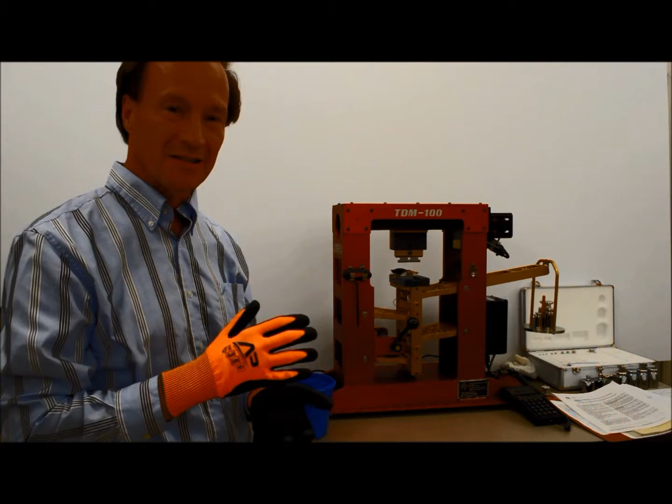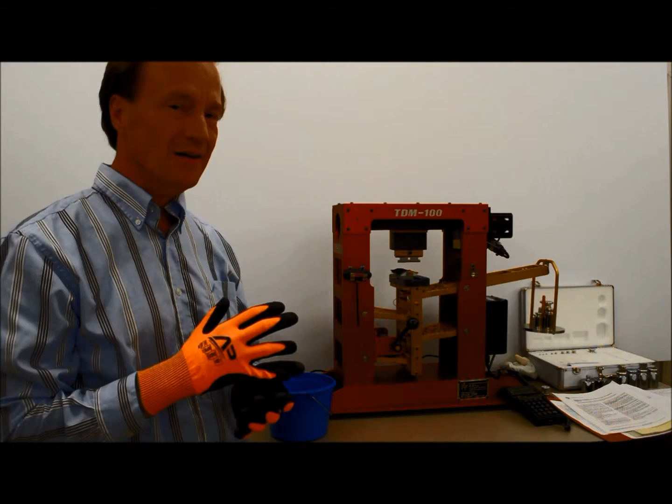This afternoon I wanted to talk to you about how you develop a cut-resistant product line. For our new product line at Apollo Marketing that are color-coded by the ANSI cut level, we've done a lot of cut resistance testing. Today we're going to show you how you do that test, how the test is performed, and what the results tell you.

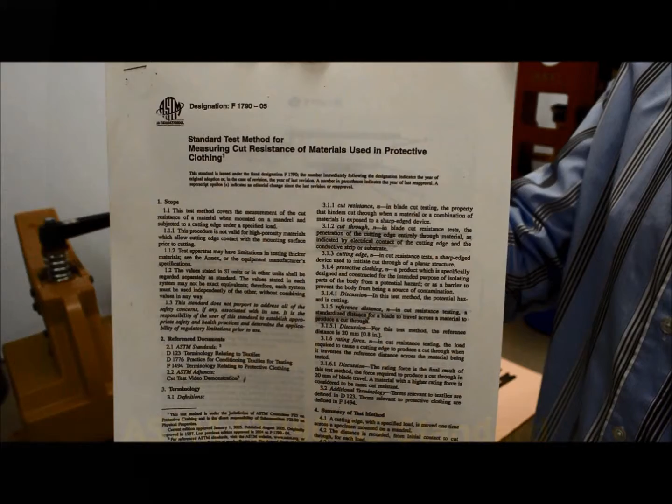And you'll see that all of our product lines are backed by an exquisite amount of data, and these gloves are developed not only for their comfort but also for their durability and especially for their cut resistance. In North America, the ASTM F1790 is the accepted test methodology for doing cut resistance testing. This is a copy of the standard.

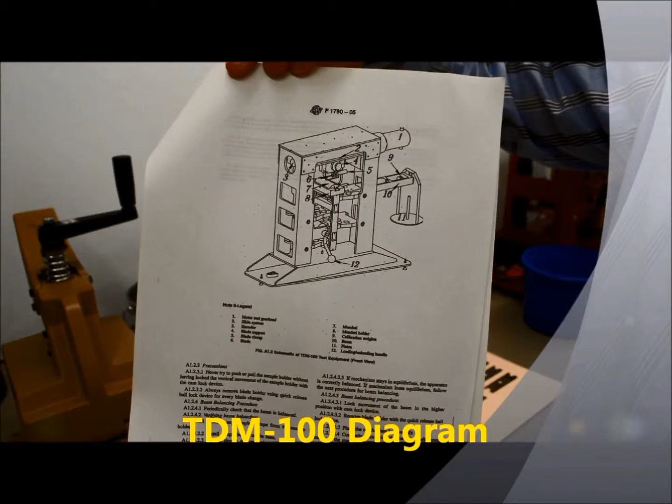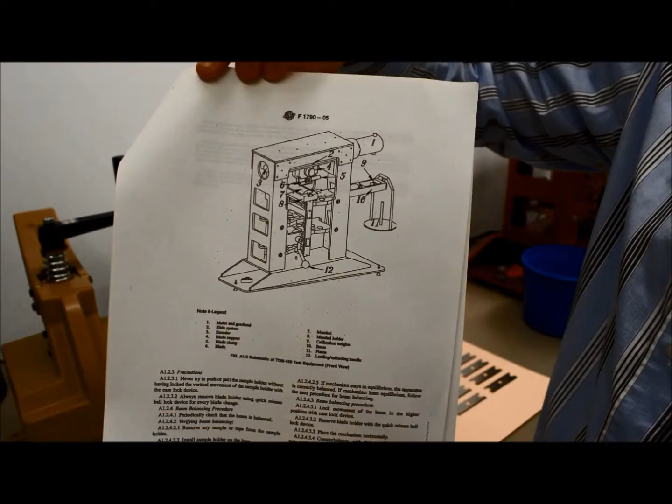If you look in the body of the standard, ASTM F1790-05, you'll see that the TDM100 is outlined in this test. This is the machine that is the most current machine for doing cut resistance testing, either by the ASTM F1790 method or the ISO method. For the ASTM method, a specific style of razor blade is used, and it takes 15 different razor blades to perform one ASTM cut resistance test.

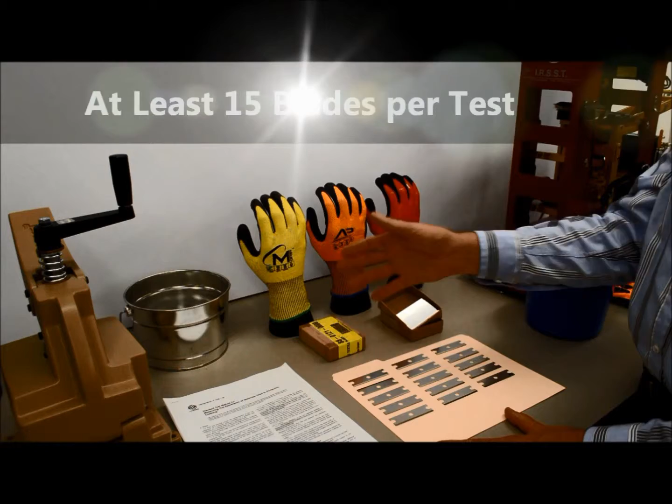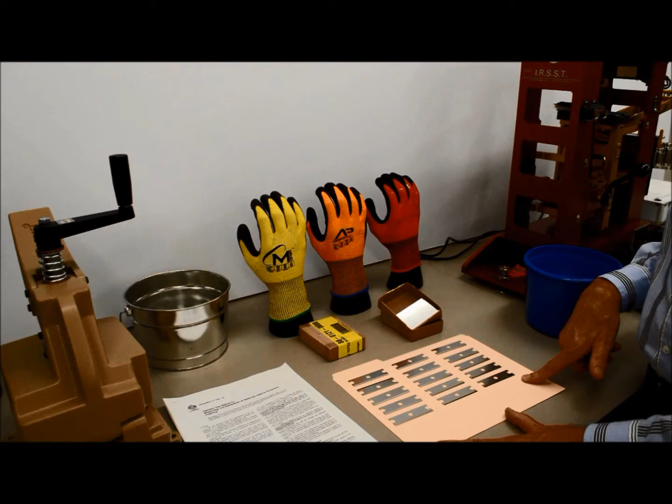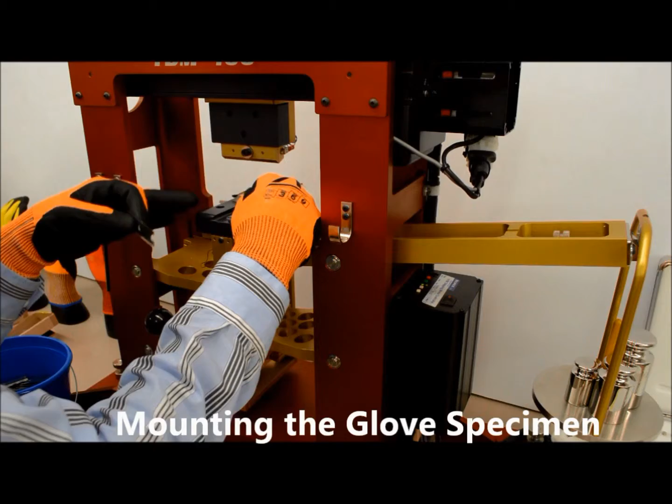So for the Apollo Level 2 yellow glove, Apollo Cut Level 3 cut resistant glove, or the Cut Level 4 red glove, we use at least 15 razor blades for each one of the tests to arrive at the ANSI cut resistance rating. On the TDM100, the first step that we take is we mount the test material. This is the yellow glove, and it's mounted onto the mandrel with the copper strip on it, and then we place the razor blade above it in the holder.

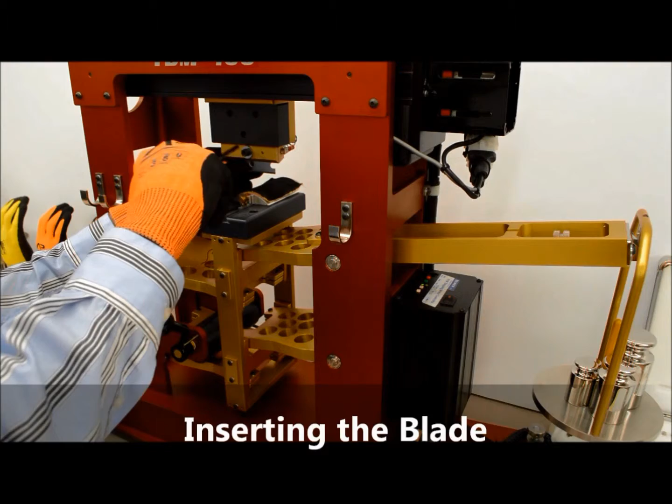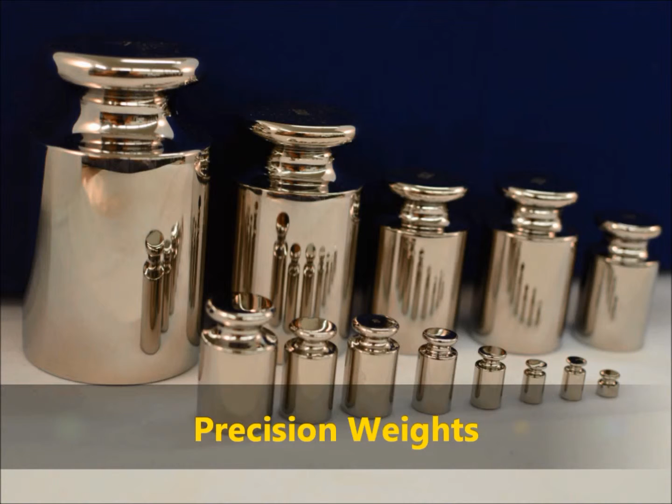We tighten it down. We always wear cut resistant gloves when we touch these razor blades because they are very hazardous. Now, we check the weights over here. For this test, we've added 1,800 grams of weight from our precision weights. And now we bring the glove material in contact with the razor blade. And on the TDM100, we start the test.

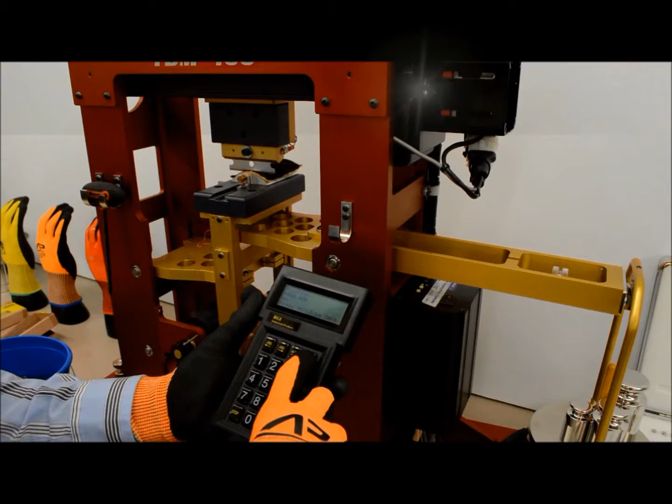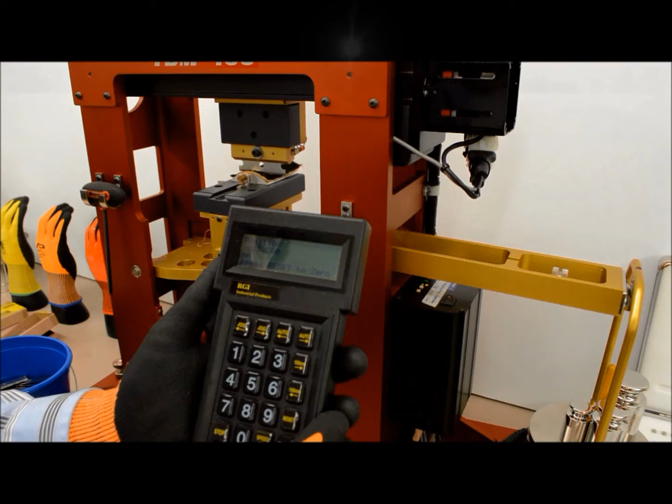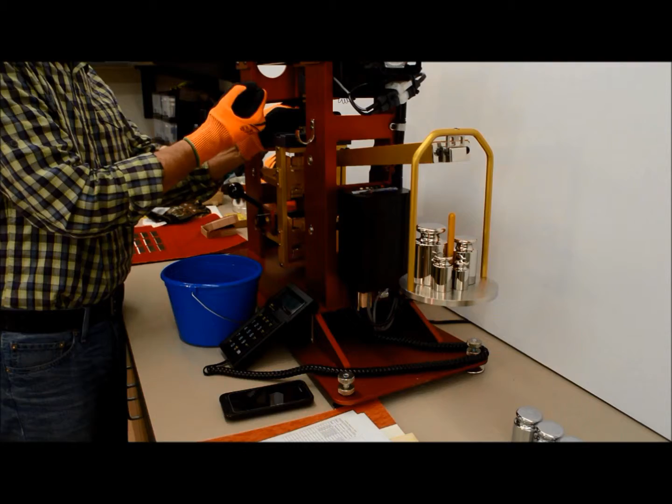We're measuring the millimeters until it's cut through, which ends up being 15.3 millimeters. That's the blade travel until the razor blade has cut through the glove material, made contact with the copper strip, and is shorted out. After each cut test is finished, the razor blade is removed. Again, we use 15 razor blades per test, and we throw it away. So we collect a lot of blades when we do cut resistance testing.

We want to emphasize that we are using 1,800 grams of weight in this test from our precision weight collection. And we anticipate this glove will be an ANSI cut level 3. So you see the glove's labeled ANSI cut level 3, and the abrasion level is listed as ANSI abrasion level 6, which is the highest rating. That's where we test the palm with the abrasion test to see how many cycles it lasts until a hole is worn in the glove.

Oh my gosh. Okay. They always call at the worst times. Hello, this is Don at Apollo Marketing. How can I help you? Well, right now is not a very good time. I'm kind of in a movie right now.